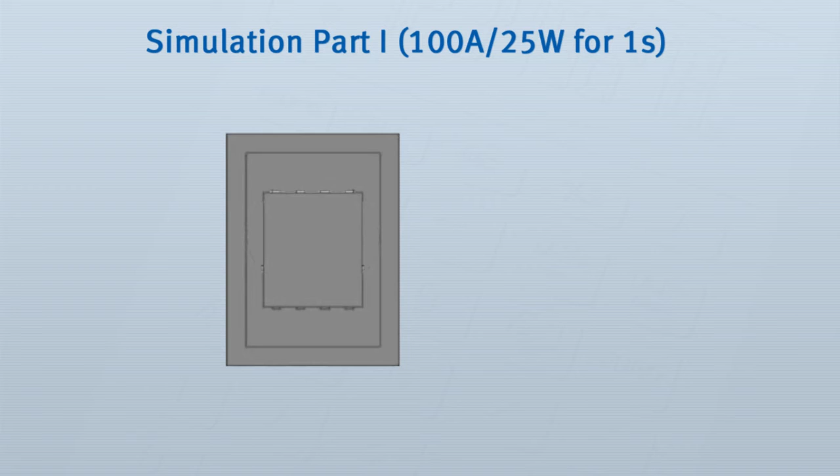And if we now look to the thermal behavior, it's similar to what you could see if you use a thermal camera. It's a view from top of the complete setup. You see here the Super SO8, some copper traces, and of course the complete area of the lead frame for aluminum carrier. You see after 50 milliseconds that just a part of that board is a little bit hotter than the other area. Remember, we had internally a time constant of 44 milliseconds.

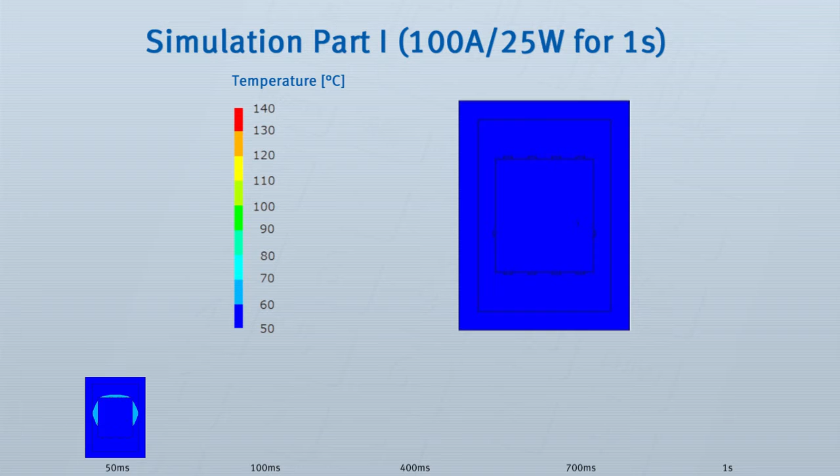That means inside the part, the temperature is expected to be much higher. Let's see how much higher. Okay, after 100 milliseconds, you see that also on top of the part, the mold compound, the plastic, you see also the temperature rise. After 400 milliseconds, you see again another detail. Here on the right bottom corner, you see the gate connector. Of course, there is no heat dissipation, so this part is always a little bit colder.

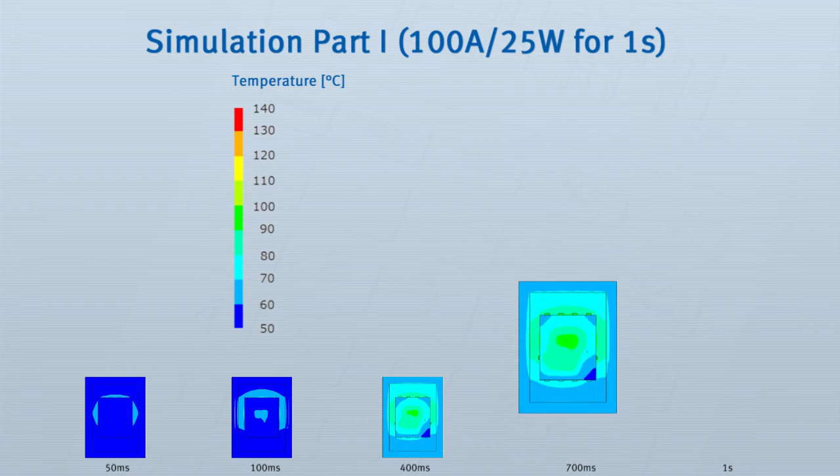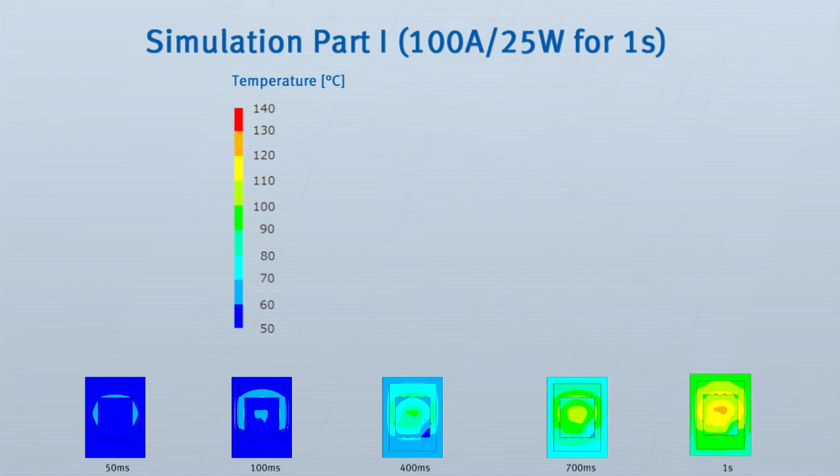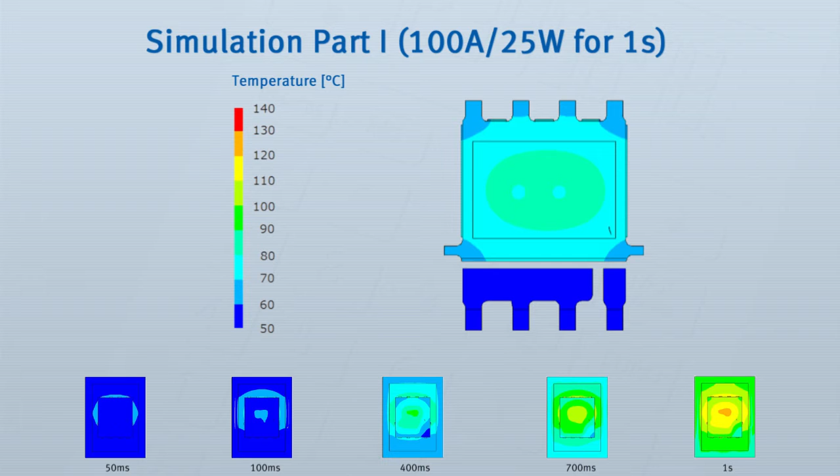After 700 milliseconds, the temperature rise is higher, of course, and after 1 second, we already have a temperature which is much higher than 110, 120, but we don't know yet what happened inside the part. Okay, next step would be to look to the bottom of our part, to the lead frame. After 50 milliseconds, you see the difference to the view from the top is already there. After 100 milliseconds, the temperature is not really homogeneous, but it's not that inhomogeneous like on the IMS board.

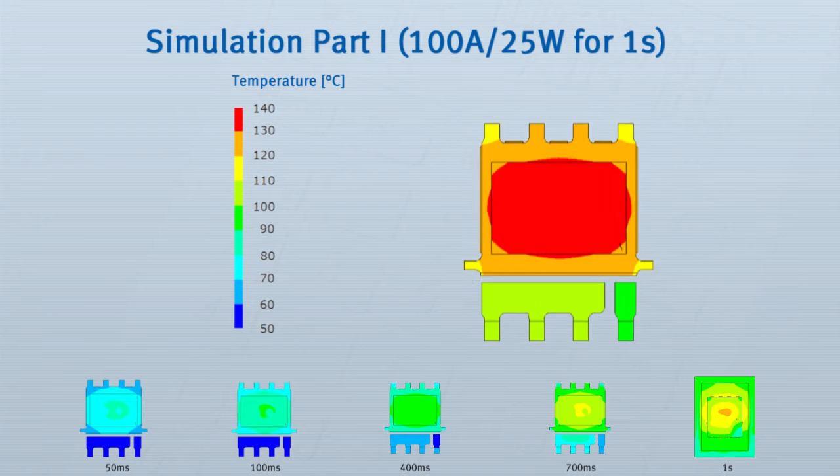After 400 milliseconds, you see already some colder dots here, and after 700 milliseconds, you see here these two dots. These are the connections of the copper clip to the chip. Of course, this cools down a little bit, these small areas. After 1 second, the chip area itself, or the area below the chip, is more or less completely heated up to 140 degrees Celsius. Last question, of course, is how much hotter is the chip inside?

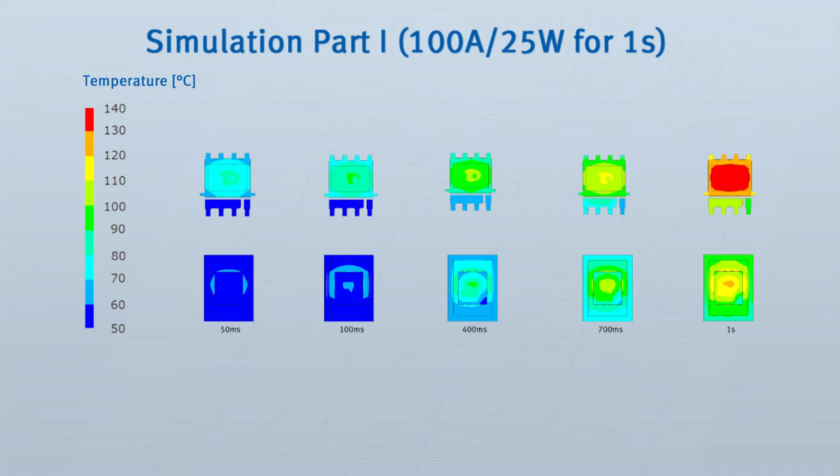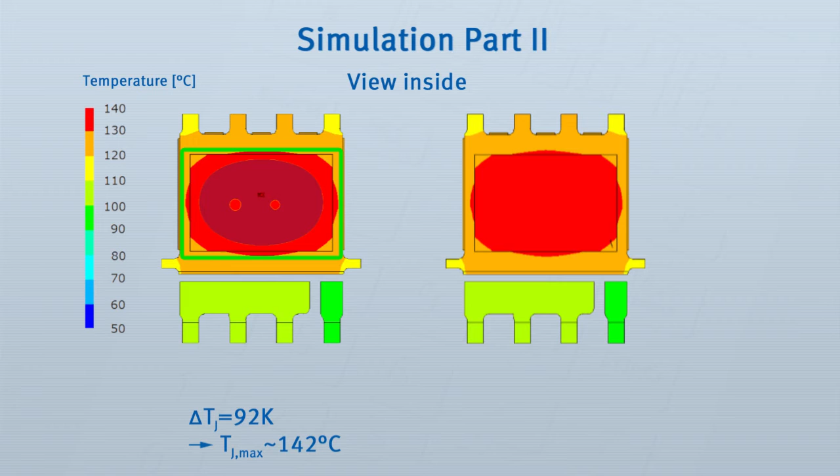Next picture shows the chip temperature after 1 second compared to the bottom side of the lead frame. You see here the difference is just 3 or 4 Kelvin or degrees Celsius. From our simulation program, we can derive the complete time behavior. What we see here is that first, as already mentioned, the temperature difference between lead frame and chip is negligible. It's around 4 degrees Celsius.

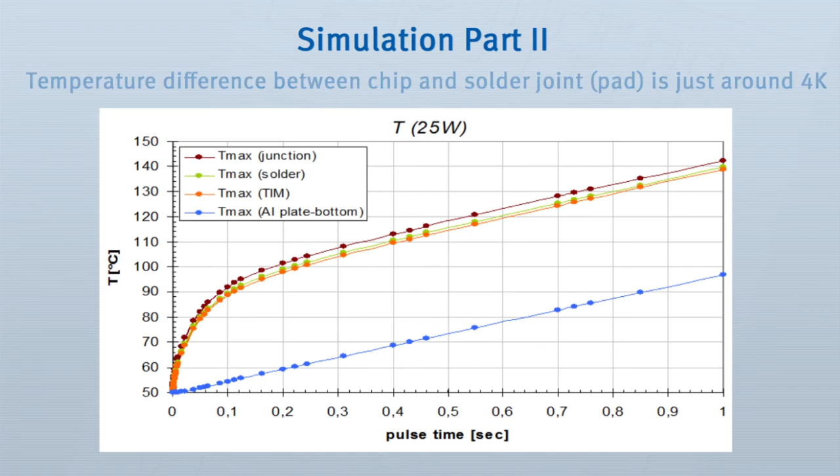We see another thing. Between starting point and 100 milliseconds, there is a strongly nonlinear behavior. Remember this 44 millisecond time constant of the part itself. After 100, 150 or 200 milliseconds, the complete thermal behavior is linear. This can give us additional hints if the problem we have is not exactly 1 second with 25 watts. For example, if you just have a 500 millisecond pulse with 25 watts, we just can read here the temperature is around 120 whatever degrees Celsius.

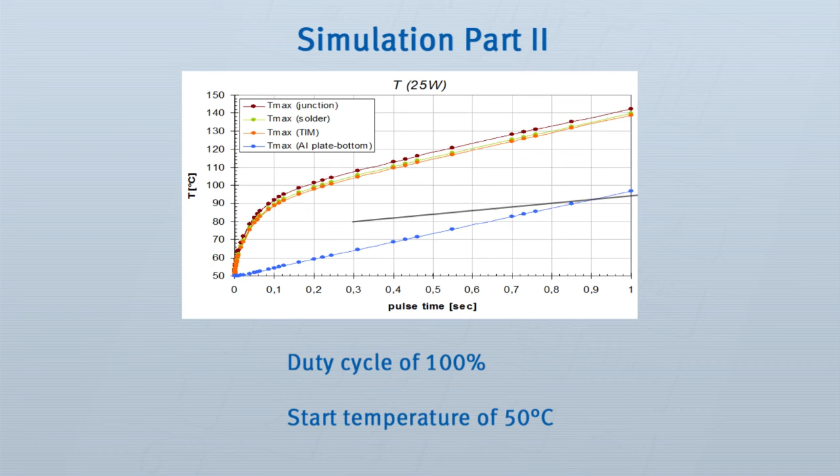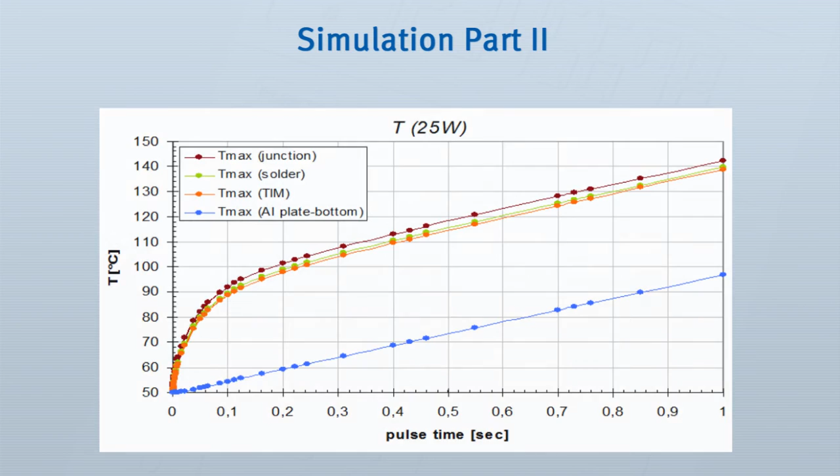If the pulse is longer, we just can increase the length of the graph to the right side. Or if the power rating is different, we can shift that graph with the ratio of the power losses compared to our 25 watts. If your result is that the temperature after your power pulse is too high, of course there are different possibilities to solve that problem. If you can't avoid this power pulse, a first possible solution would be to choose an IMS board with a lower thermal resistance, but maybe too high costs are then the problem.

A second way to solve this problem is to increase the thermal capacity of the complete arrangement. Of course, an increase of the area of the lead frame itself wouldn't be the solution. As shown on the last pages, the time needed to fill that thermal tank is too high compared to our 1 second problem, the overload condition. Another idea, of course, could be to increase the thickness of the aluminum carrier. This indeed will decrease the maximum chip temperature, and it could be the solution if higher costs and additional space are acceptable.

Infineon offers a third solution with no issues regarding space and weight: a MOSFET with a lower RDS(on). We started our investigation with a 1.6 milliohm part, the BSC016N03LS. Looking to the huge Infineon portfolio, we will find a MOSFET from the same family, in the same package, and the same voltage rating with a much lower on-resistance, the BSC011 with 1.1 milliohm.

If you have to go to higher switching frequencies, another part offers additional features: the BSC011 with a suffix I at the end, with nearly the same RDS(on), but with a monolithic integrated Schottky-like diode on the chip. This MOSFET offers an optimized switching behavior, especially at higher frequencies.